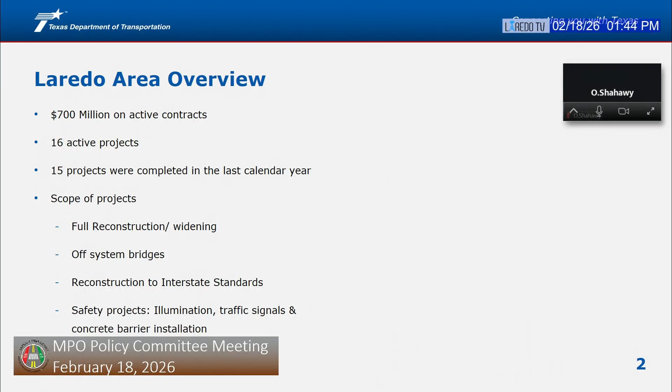Good afternoon, Jose Vargas, Laredo Area Engineer, here to present the TxDOT project updates. First slide, like always, a brief summary on the overall projects in the office. We're about 16 active projects. We closed 15 over the last calendar year, and we're at about $700 million on active construction projects.

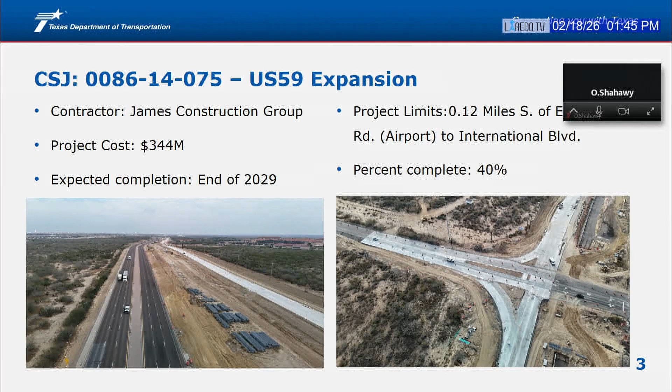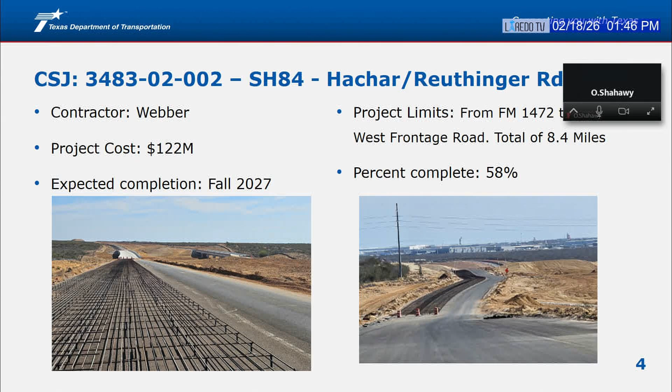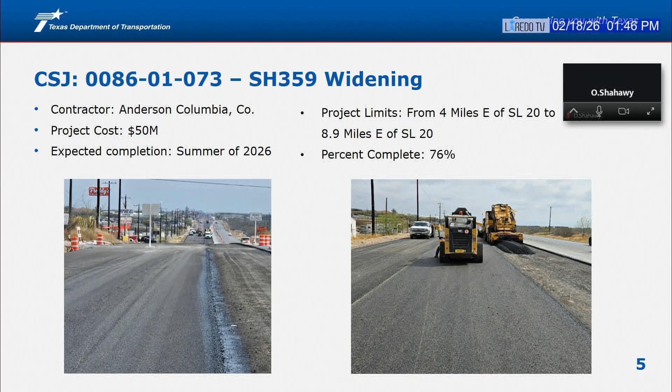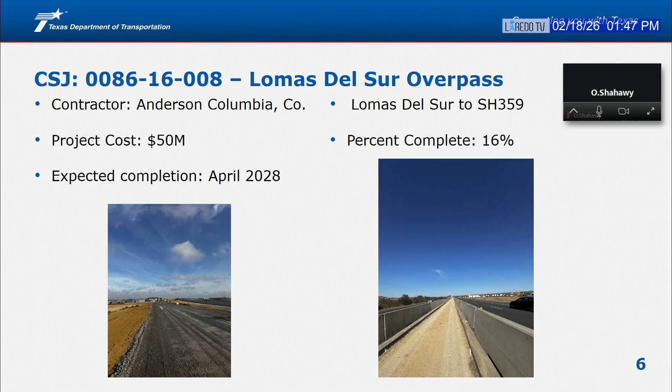Lomas del Sur, project cost $50 million, contractor Anderson Columbia, completion date by spring of 2028. Some pictures on the right hand side show where the raised median used to be. We are preparing that area to install the concrete barrier that is going to divide the northbound and southbound lanes, and also some flexible base being installed for where the newly frontage roads are going to be, as we make space to drop the bridge in the middle. Percent complete, 16%.

May I ask, why did it take so long for the striping on that? It just sat there bare and they didn't do anything for over a month. The striping took so long after the paving and everything because, since it's not final yet, we decided to open the passing lanes, but the final surface is still pending. For the final striping, we're striping so we can move traffic back and forth, making some space for the paving. We're going to go back probably by the end of March and should be working on that area with more hot mix on the final. And then when you get to Jeffries, where the split is where you can turn, you have the left lane dedicated as a turn-only lane, but it doesn't say anything until you get right at the intersection.

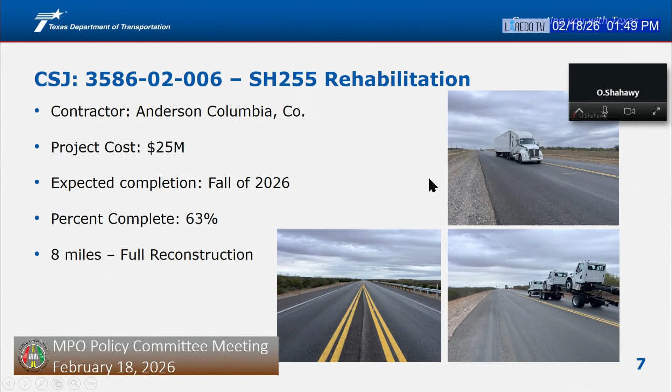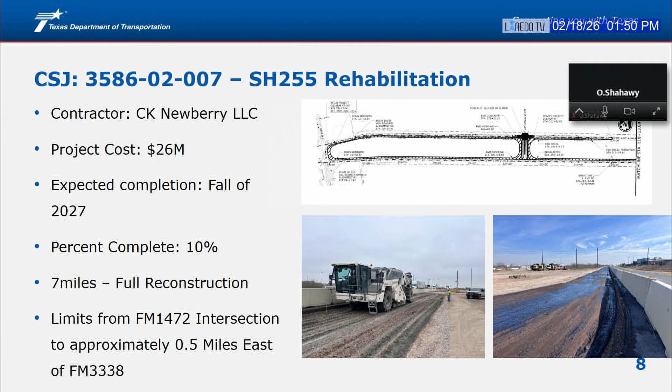And with that wraps up the updates. Again, just please share the message: watch out for workers in the road, drive the speed limit, and help us end the streak. So, I'll take any comments, questions.

Mayor, if I may, I also wanted to mention that not only have we been pretty busy on the construction side, we've been pretty busy on the project development side as well. So next month, we're gonna be letting the I-35 at Uniroyal project. That's about a $260 million project.

It's gonna involve the continuation of the 6-lane on I-35, the main lanes. It's gonna involve the reconstruction of the Uniroyal overpass, and also the new overpass at Hachar on 35. So the frontage roads are also gonna be changed from 2-way operation to 1-way operation.

So again, that's a major project coming here. That's next month, but probably in early summer is when we probably gonna start seeing construction. And then in June, we're gonna be letting the last 3 remaining direct connectors at I-35 and 69. So a lot of things happening still here in Laredo.

All right. Thank you. Any other questions? No? All right, thank you.

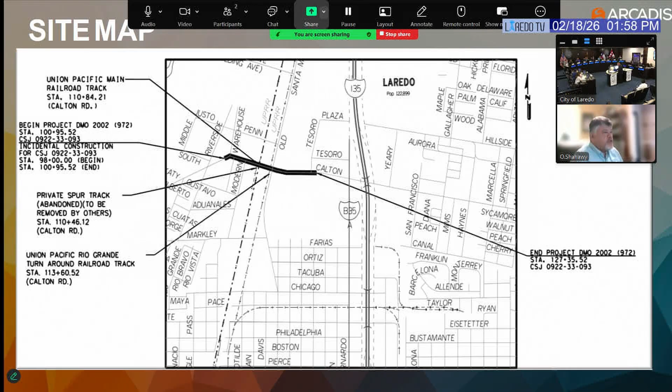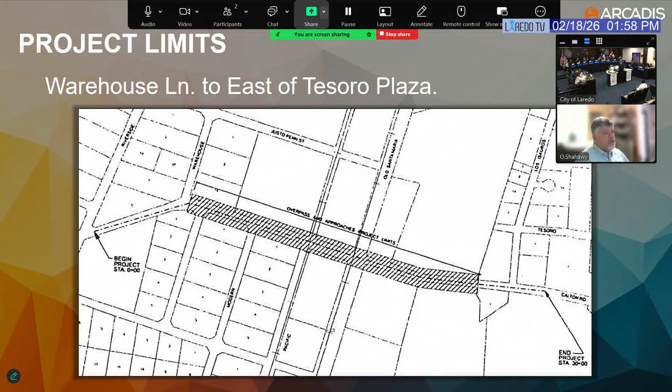If we can go to the next, the project extends from Warehouse Lane to almost East of Tesoro Plaza. It is the new development for putting a bridge to be overpassing this area for traffic and connecting the area without impacting the railroad or having any railroad impact for crossing.

If we go to the next, what happened in this project on this addendum, that's addendum 12 for this project, it was extended to have an additional survey, requested to have an additional survey 1,000 feet at the railroad track to make sure we are satisfying the UPRR vertical clearance required by them. The survey was completed and reviewed, and the plan was developed based on this survey, and all the data was provided and checked by TxDOT.

If we can go to the next one, please. As you know, it is going to be having a bridge over there, it is a new grade separation. As I mentioned before, it is crossing over the Union Pacific Railroad main line and Rio Grande rail. The bridge will be about a 5 span steel plate girder bridge, almost 866 feet overall. The bridge approaches will be supported with MSE walls, that is part of the development, especially since we are having confinement, especially for the space where we can't use anything else, so we have to use MSE walls.

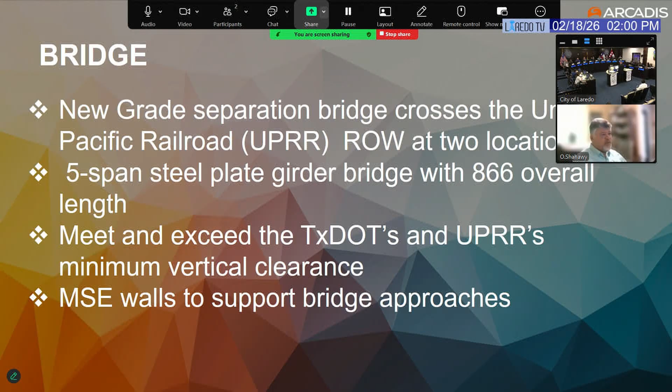If we go forward. For the utility, we are having the utility, which can be a separate package, and we suggested that if we can have an early release for the water and sewer, that it can be released by the city, because it has already been completed 100%, and it is not going to have a big impact. So we can separate it, or join it with the other project, as we are putting the whole project together as one piece. For electrical and telecommunication, Charter and AT&T still have not relocated. They are proposing to relocate their utility, but they are waiting and pending only for the construction start date, which we are going to go through later on.

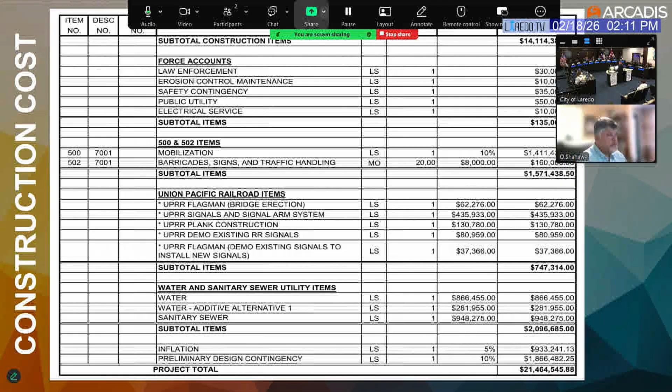The reason it comes before the MPO is because there's a federal earmark on it. With that federal earmark, we have to carry it on our transportation improvement program. That's why these updates happen frequently, or sometimes sporadically, at this meeting, to keep that communication going. The city is the project sponsor, so they're working on this project, and TxDOT has that oversight. There are project managers on both sides who work together. The MPO's role right now is making sure it's on the planning documents it needs to be on, and that we keep that communication going.

That's something the board wishes, right? It can be more frequent too, that's something you all request. Again, this funding is a federal earmark. It's not funding that came from any of the MPO funding categories, like Category 7 or anything like that. But because of the federal earmark, we need to continue to show that on our transportation improvement program.

And you would think even a federal earmark should have a higher designation with the railroad, saying, hey, federal money, we're going to be doing it according to federal regulations and all this kind of stuff. And they still hold you hostage.

Mayor, if I may—go ahead. We have our TxDOT project manager here. I don't know if you all have any questions for our project manager. Well, it's just, how can we help you?

How do we go to the legislature, and the federal legislature, and say TxDOT needs the ability to design an overpass the way they need to design it? These railroads have to set their minimum standards, and as long as it's above the minimum standards, they shouldn't have to review or do any of that.

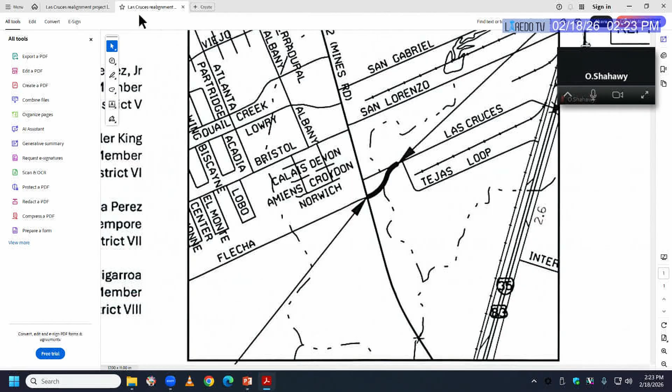Can we go back to the design? The layout, the overall layout? No, the one before this one. The corner cuts, they look like the radius is a little wider. Is this TxDOT or is this city? Texas and city, both.

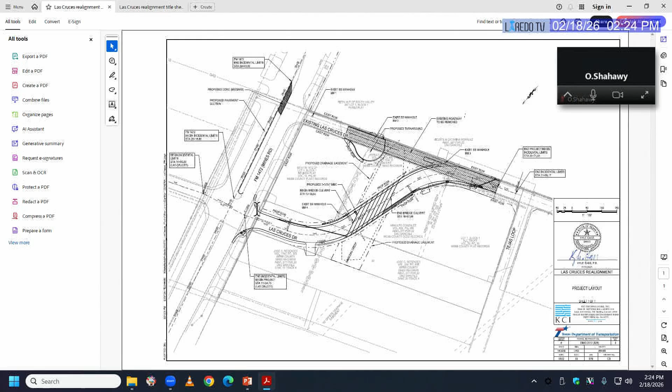I just hate seeing these corners, the radius is a little too sharp on them. How many times do you see corners run over by an 18-wheeler because they don't take a wide enough turn and continue to trash that? We can definitely look into it and see. Well, this one actually, the one on the very bottom, looks like it has a much bigger radius. Okay, we'll look at them. The top one, not so much, and then I don't know about over here.

So is that road not going to go through anymore? No. So Las Cruces will be blocked off there? At this point over here, okay. And what is that hatched mark area? That's what's going to be removed, demoed, okay. And are those curves all right for 18-wheelers? Because you're probably going to have some queuing up there. All right, very good, any other questions?

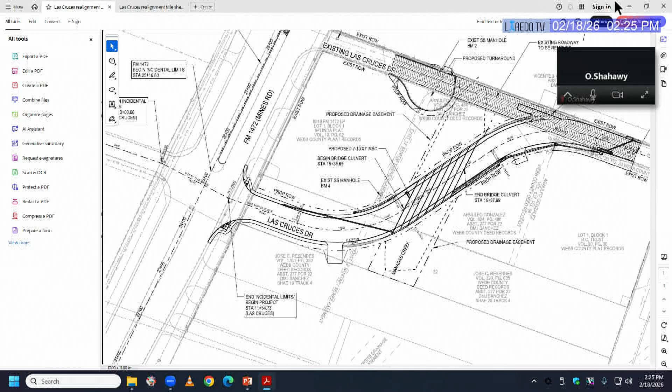Good luck on another project, how long is that one? From the time it starts? This is at least 15 years, no? You're talking about time from when we first started? Yeah, probably, it's one of the older projects. So this one's finally out. And then we buy, what, did you have to buy out the Pizza Hut, or no? Yeah, it's where the Pizza Hut's on the corner.

Okay, any other questions? No? Thank you, Mayor. Okay, thank you. All right, director's comments. All right, thank you, Mayor, appreciate it.

Quick updates: on February 10th, Ms. Briones from our staff attended the Border Trade Advisory Committee meeting in Eagle Pass, Texas. Our mayor and representatives from the county were there as well, along with representatives of TxDOT. Those were really good meetings.

The development of the 2030 Transportation Improvement Program is currently in progress. We're coordinating with the project sponsors, like the city, TxDOT, RMA, county, and of course Metro. We're hoping to present a draft TIP to you all at the April meeting, with final approval expected in the May meeting.